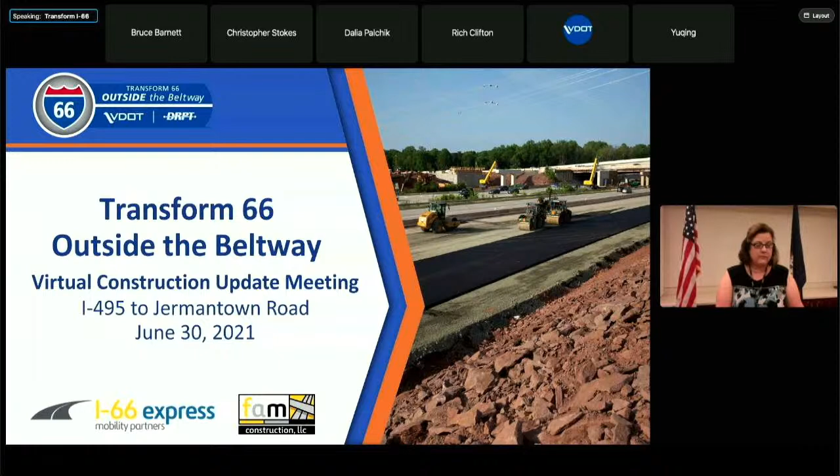I'd like to welcome you tonight to our virtual construction update meeting for the Transform 66 Outside the Beltway project, hosted by the Virginia Department of Transportation and our project partners, I-66 Express Mobility Partners and FAM Construction. My name is Michelle Holland, and I'm with VDOT's Mega Projects program. On behalf of our team, I would like to thank you for joining us tonight.

Tonight's session will focus on construction activities along the I-66 project corridor in the eastern part of Fairfax County, from I-495 to Jermantown Road. Tonight's session will begin with a presentation followed by a question and answer period. Our goal tonight is to provide you with the latest construction updates and also give you an opportunity to interact with project staff and ask questions.

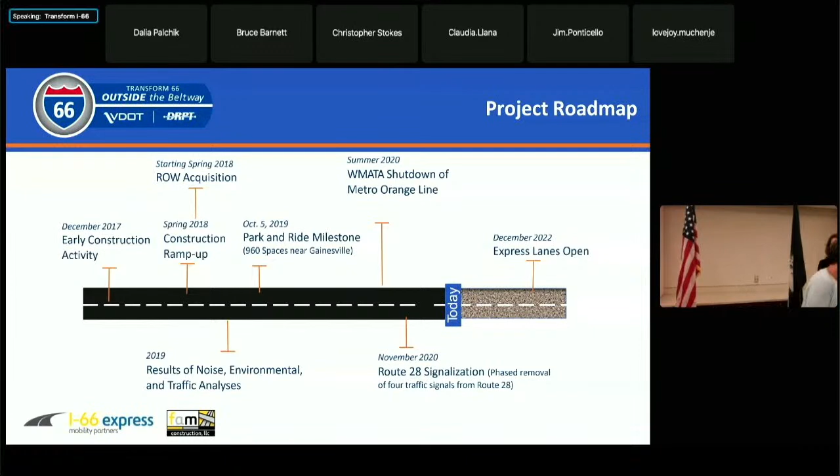So what are we building at the 495 interchange? At this interchange, we're reconstructing, adding 8 new ramps that will accommodate new connections to the I-66 express lanes. Work's been underway for quite a while here at this interchange. We've set beams on several of the new bridges, we've been doing an extensive amount of earthwork for those new ramps, and we've also begun some partial demolition.

Earlier this spring, we completed partial demolition of the I-66 West Bridge over 495 South, to allow for the widening of those I-66 bridges over 495. Coming up over the next few months, we will continue setting beams on new bridges and ramps throughout the interchange. As you travel through this interchange, particularly during the overnight hours, you should expect traffic impacts due to those beam installations, occurring throughout the summer and into the fall of this year.

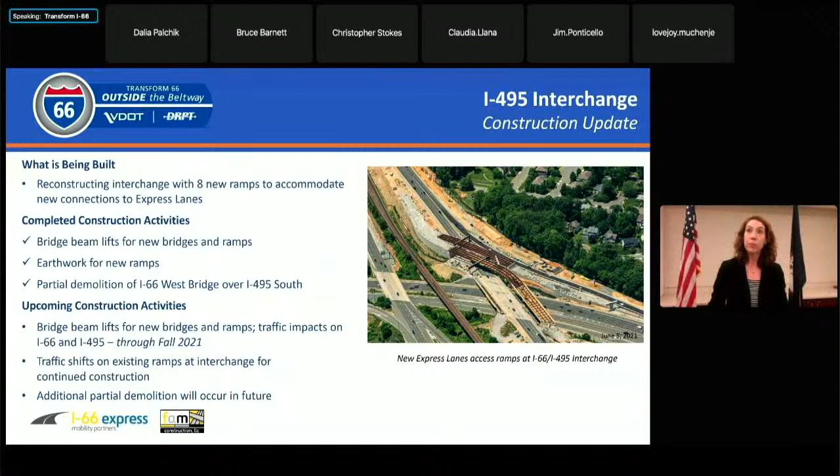At Gallows, we are building new Gallows Road bridges over I-66. These bridges are being built in 2 phases to allow for continued through traffic on Gallows Road during construction. We're widening the bridges and shifting Gallows Road slightly to the east, also improving pedestrian and bike access across Gallows Road. So far, we've completed construction of the future northbound Gallows Road Bridge.

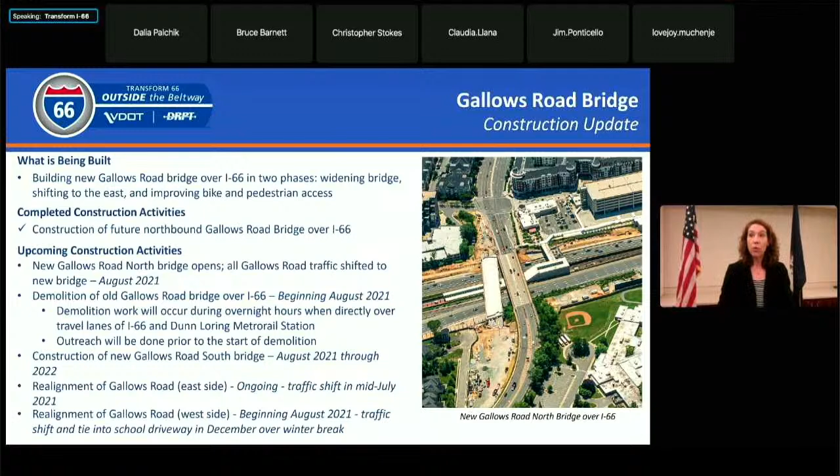Construction will be done at the interchange in phases to keep traffic on Nutley Street moving, for both the roundabouts as well as the permanent ramps. A major benefit of this design is that it does not require demolishing the existing bridge nor constructing a new bridge in its entirety, which was seen as a benefit to the surrounding communities when we approached this design. There will, however, be multiple traffic shifts on Nutley Street over the next year and a half as we work to construct this interchange in phases.

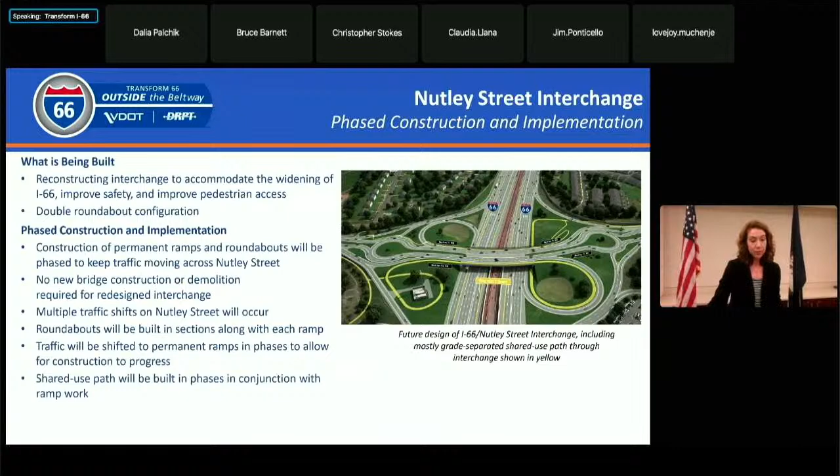Here we have shifted traffic onto temporary ramps to and from I-66, and we've begun construction of both pedestrian box culverts as well as drainage crossings in the area. These pedestrian box culverts are what allow us to have grade separation between the shared use path and the roadway as the shared use path winds through the interchange.

What's coming up in the future: we'll continue work on construction of the box culverts for the pedestrian path under Nutley Street, as well as begin construction of the ramps on the western half of the interchange. We're working on 4 major retaining walls in the area, and we'll begin rehabilitation of the existing bridge abutments this fall. Later this fall, we'll be doing some rehabilitation of the existing bridge deck.

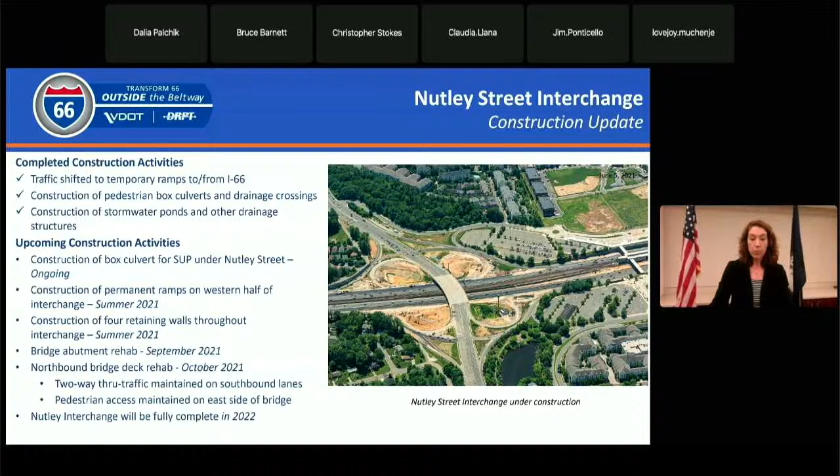So what's coming up here? We are constructing those express lane ramps in the center median. We began setting steel beams earlier in June, and we'll complete installation of some concrete beams in July. We'll be working on those ramps and anticipate having them completed this fall.

As that work progresses, pedestrian access currently exists across Vaden on the east side along the shared use path, while the west side sidewalk is currently closed due to active construction on the west side of Vaden Drive. By this fall, we'll also be able to open that west side sidewalk across the bridge from Saintsbury Drive to Country Creek Road.

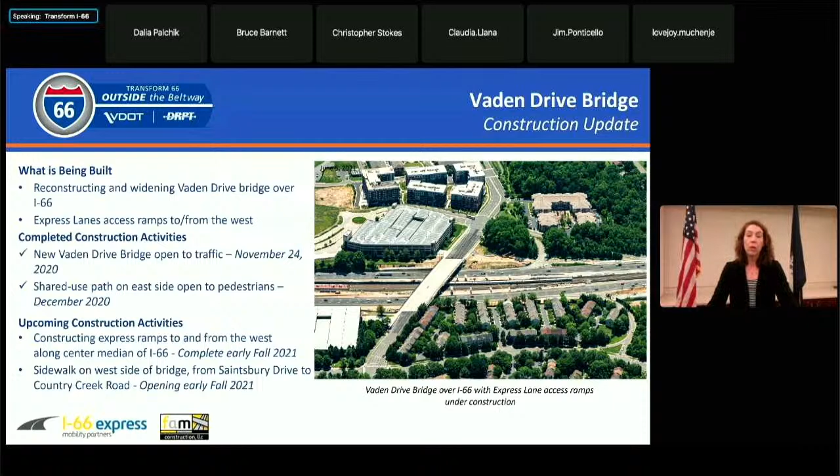At 123, we are reconstructing the entire interchange to accommodate the widening of I-66, as well as the addition of express lane access ramps both to and from the east and the west. In the final configuration, 123 will have access to the express lanes in both directions at all times. So far, we have shifted traffic onto the new Route 123 North Bridge over I-66.

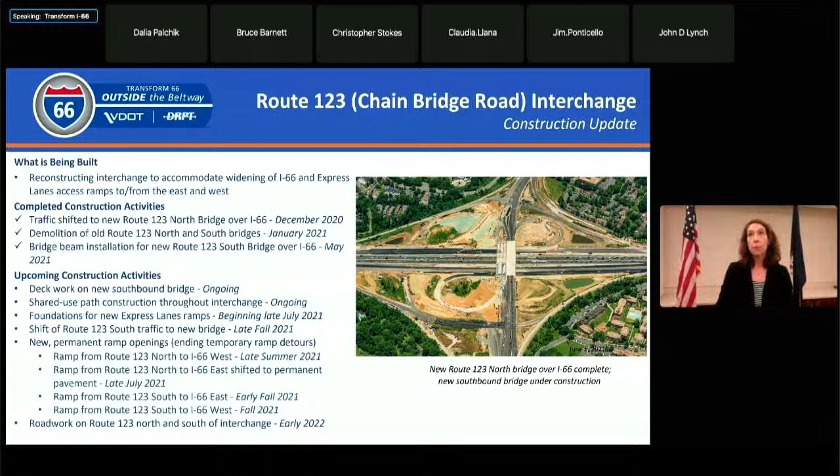Shortly after opening the new bridge, we demolished the old bridge and began construction on the remainder, or the second phase. The old bridge did not have pedestrian facilities, but the new bridge does. The sidewalk just north and south of the new bridge on the west side of the roadway will open to pedestrian access in early July, in the coming days. Throughout the summer, you'll see continued road work as well as construction of the remainder of the new bridge.

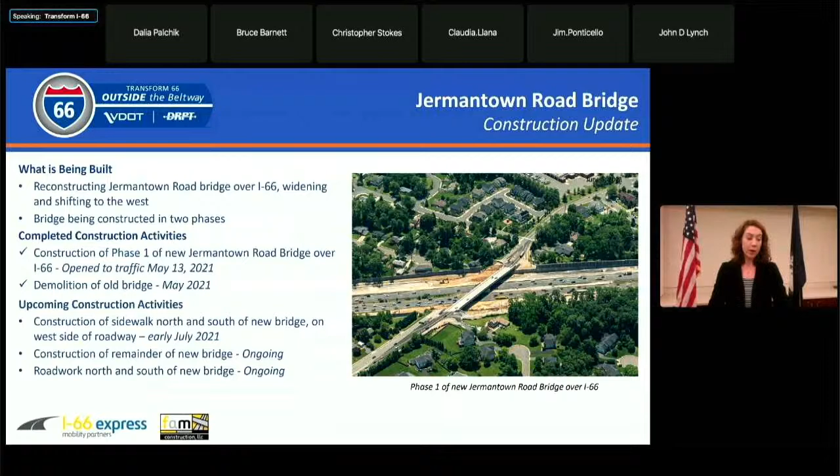My orientation is off, I'm sorry. We're looking towards the south over here. The south, excuse me, I was confused.

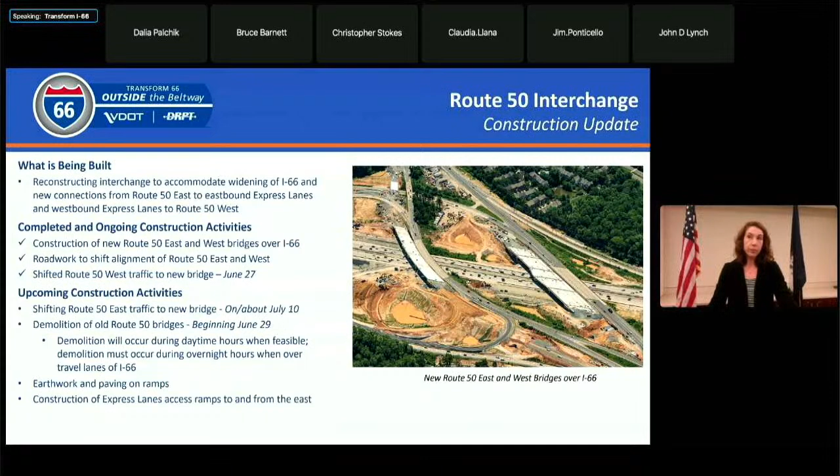Our work along the project corridor is not limited to interchanges and crossings. We are also widening I-66, and much of our work over the last year has been along Mainline 66, in preparation to shift travel lanes of I-66 east and west onto the new general purpose, or outer, lanes throughout the corridor. We began shifting various sections throughout the corridor this past spring.

As Susan mentioned earlier, we met a milestone just last night by completing the shift of traffic out on the far western portion of the project corridor onto those new general purpose lanes. We're working to do that in various sections for the remainder of the project.

Between 495 and Jermantown Road, we have already shifted travel lanes between Chain Bridge Road and Blake Lane on 66 West, as well as in that same area on I-66 East. In the late July, early August timeframe, we will shift traffic between Gallows Road and Nutley Street on 66 West to the new general purpose, or outer, lanes through that section.

As you may have experienced in the area between Blake Lane and Route 123, some of these shifts, particularly in parts of the corridor where our space is limited, may include temporary traffic splits, where we split off a lane of traffic to allow work to continue in between.

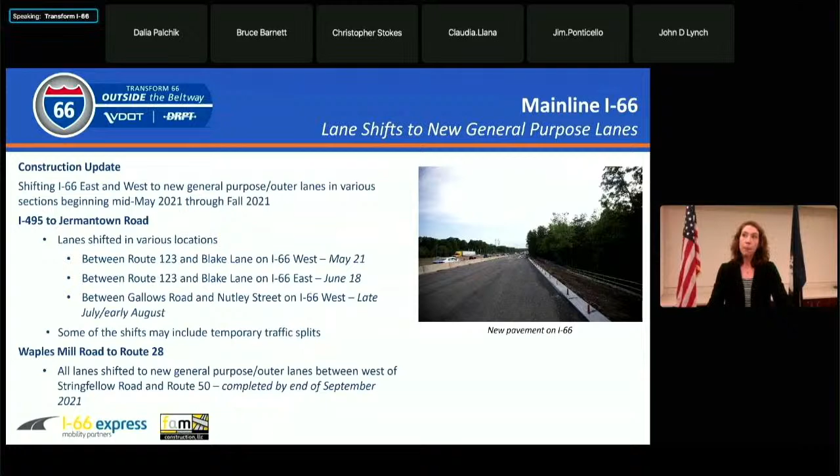In addition to the roadway widening, we are also continuing work on construction of noise walls and retaining walls in various locations throughout the project corridor. Just like many industries, we have experienced some delays in material supplies, particularly with steel posts and panel production for noise walls. Some of those delays are being felt across the corridor due to the impact of the COVID-19 pandemic. We continue to work through that with our manufacturers and suppliers as best we can.

As we work to construct those new walls, in addition to noise and retaining wall construction, we are also working on constructing that shared use path that will run along I-66 West, particularly in areas between Blake Lane and Waples Mill Road, and around the Nutley Street interchange and near Cedar Lane Bridge, some of the more noticeable areas as you drive through the corridor where you'll see that shared use path being constructed.

One of the final items that we need to complete once those noise walls are installed is final grading and drainage on the non-highway side of the new noise walls.

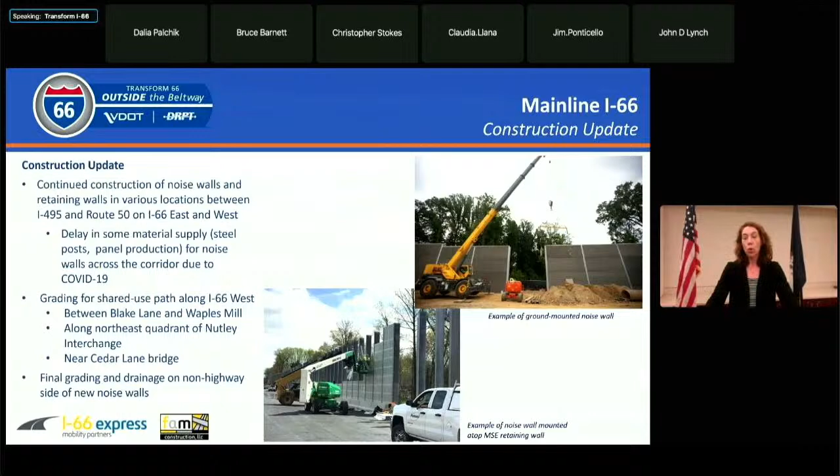As part of our project, we have also developed a corridor revegetation plan. We developed this by construction subsegments, as we have divided up our construction work as well. These final approved plans will be available on the project website.

However, any plantings of trees along the project corridor are restricted to within VDOT right-of-way where we have space available and in spaces that are not encumbered by other utilities or easements.

Any vegetation that we plant throughout the project corridor will occur as a final construction item, as we finish out areas during the closest planting season to give the plants the best chance of survival, and also to limit the possibility of needing to come back and remove plantings should additional work need to be done.

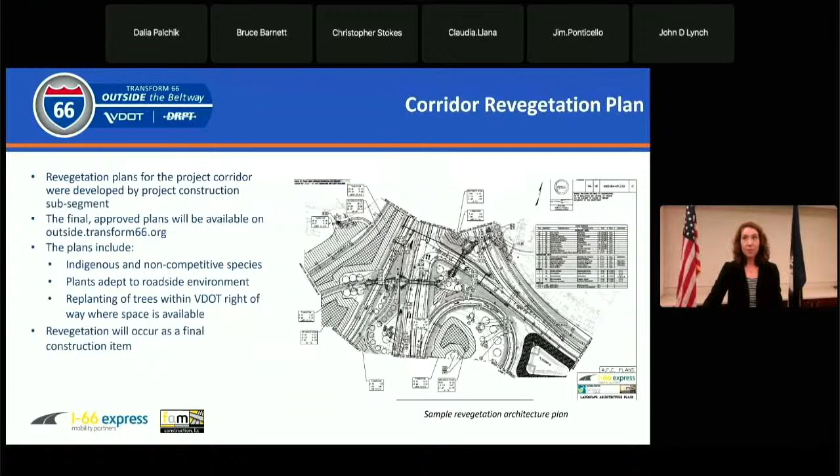Skip the slide, sorry about that.

As a final slide, we have lots of great tools and places where you can go to get more information about what's going on with the project. The project website, transform66.org, has all kinds of information about lane closures and traffic pattern changes. This information is updated on a weekly or more frequent basis as needed.

We have section pages for 19 interchanges and overpasses and other various features along the project corridor. There's an interactive map that allows you to see project features by zooming into a specific location along the corridor, and much, much more. So I strongly encourage you to visit the project website.

If you haven't visited, or if you have but it's been a while, please go, because I'm sure things have changed since you've last been. We also send out regular email communications, typically about 5 emails or so per week, announcing upcoming traffic pattern changes and travel impacts throughout the corridor. If you do not receive these email and traffic alerts, you can sign up for them on the project website.

To stay informed, a great place to keep up to date on current events in the VDOT world is on Twitter. The VDOT Northern Virginia Twitter page is very active and pushes out reminders, advisories, updates, and current traffic incidents. It's a great place to stay updated as construction continues and as you travel throughout the region.

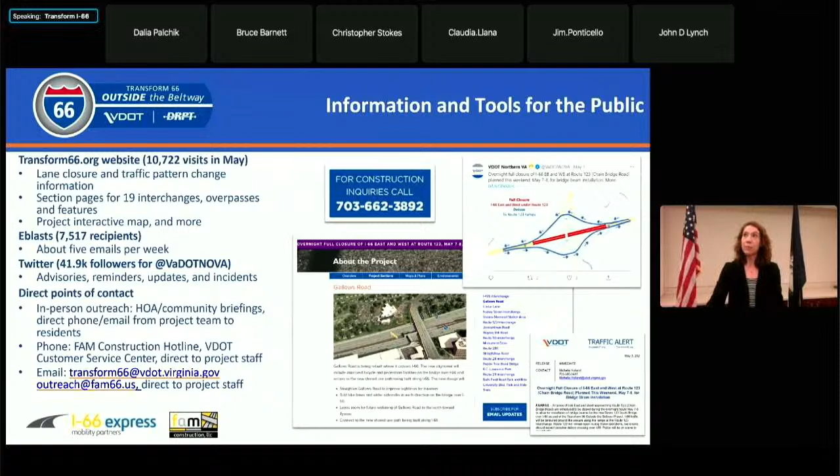And with that, I'm going to turn it back over to Susan, and we'll begin our Q&A session.